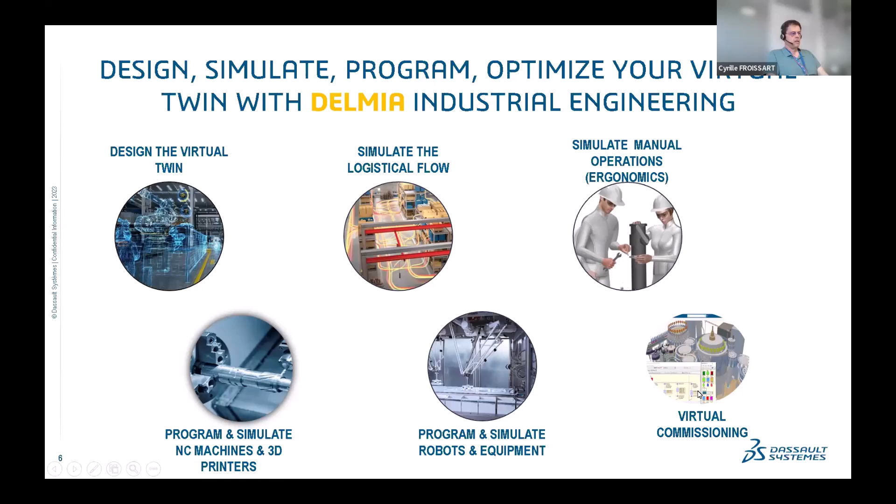So again, the virtual twin: we create the factory in 3D, we simulate the factory in production, we simulate the manual operations, we simulate robotics and equipment, we simulate the NC machines and the 3D printers. And we prepare the programs, and before going into production, we test everything. This is what we call virtual commissioning.

The advantage is that all these solutions are connected because they are all based on the same 3DEXPERIENCE platform. We are using a 3DEXPERIENCE database, and all the applications use the same data set, but for different users. There will be someone in the company with a strong focus and skill on the layout and the building, etc.

Someone will create the factory in 3D, probably using CATIA, SolidWorks or other CAD software. Then someone will take this data and do a simulation in a dedicated DELMIA application. Then another user will probably add the robotic or NC machine simulation and programming.

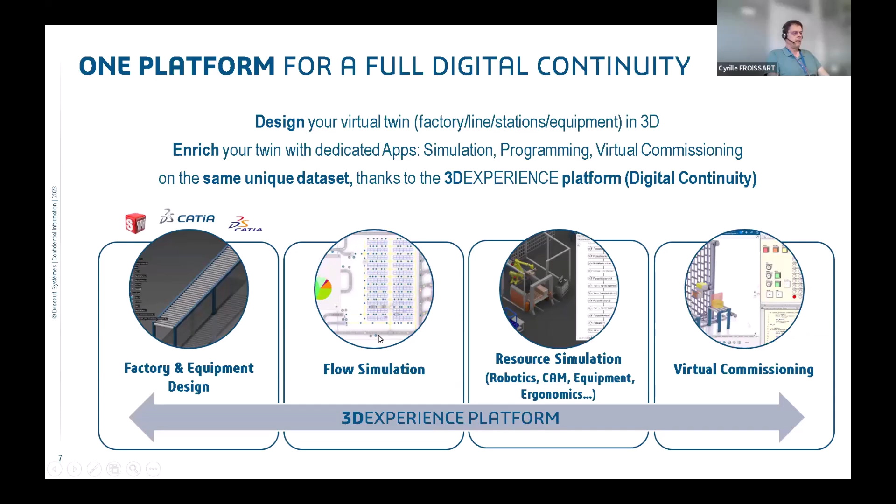And then after, we can do the virtual commissioning before going into production. That's an advantage: it's always using the same data set, the one data set in the database, used by different users just switching between applications, but no more dedicated applications and no more data sets specific to be recreated in each application.

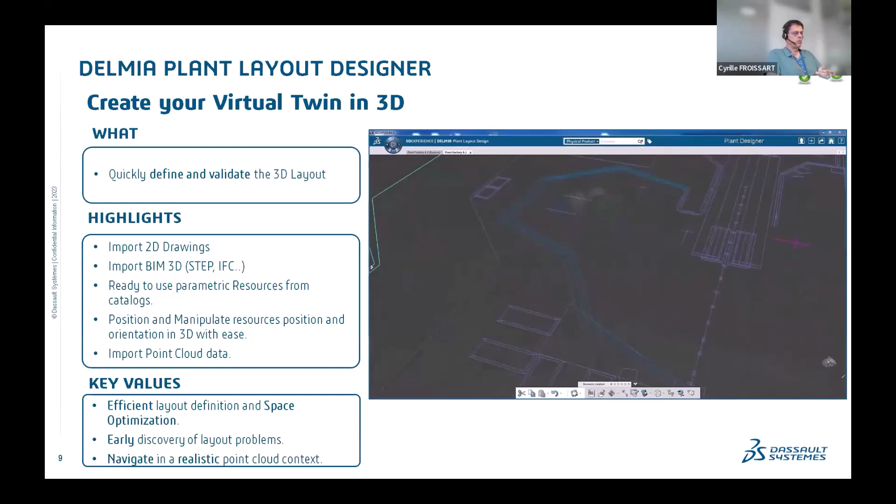So let's focus on the first set of applications, where we actually create the factory in 3D. What we see in the video is that typically we start from a 2D drawing. Here we see the 3DEXPERIENCE platform, and we see the name of the application we use here, Plant Layout Design. So in this application, I start from a 2D drawing that I import, typically from DXF or DWG.

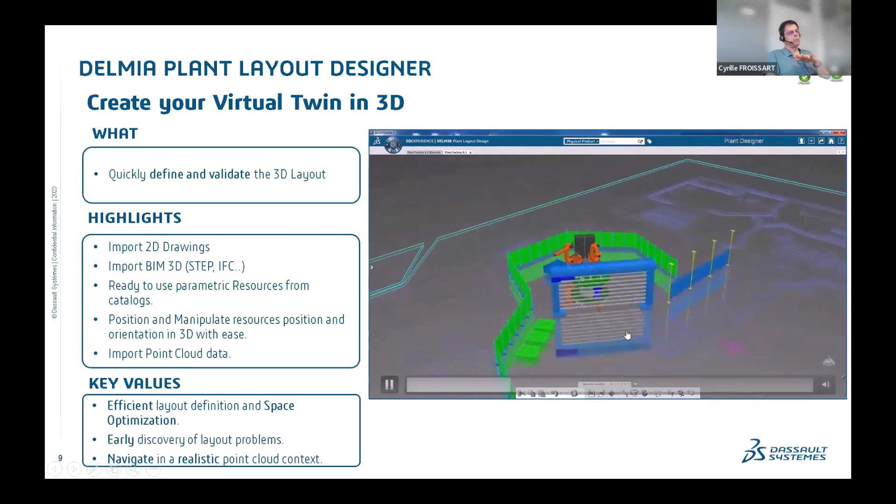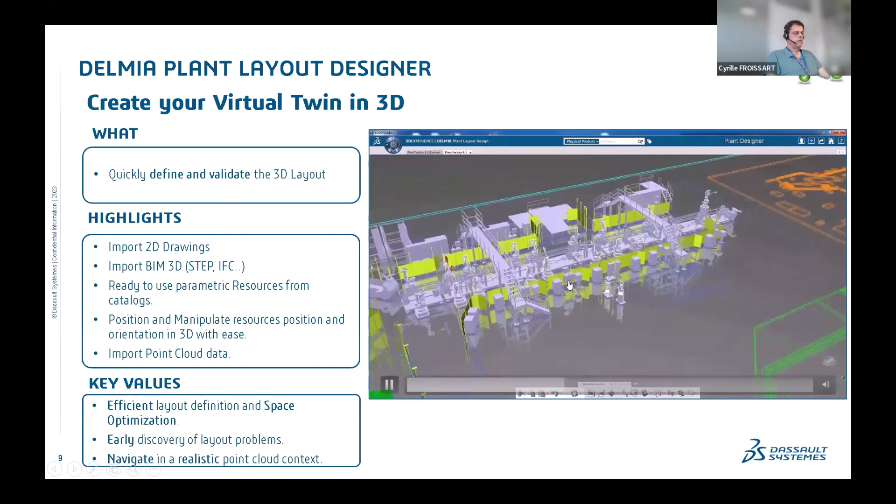And on top of this 2D, I can position my 3D devices coming from my library of robots, for example, but also coming from other CAD sources if I have the 3D model of the equipment. I can also use some specific BIM format like IFC.

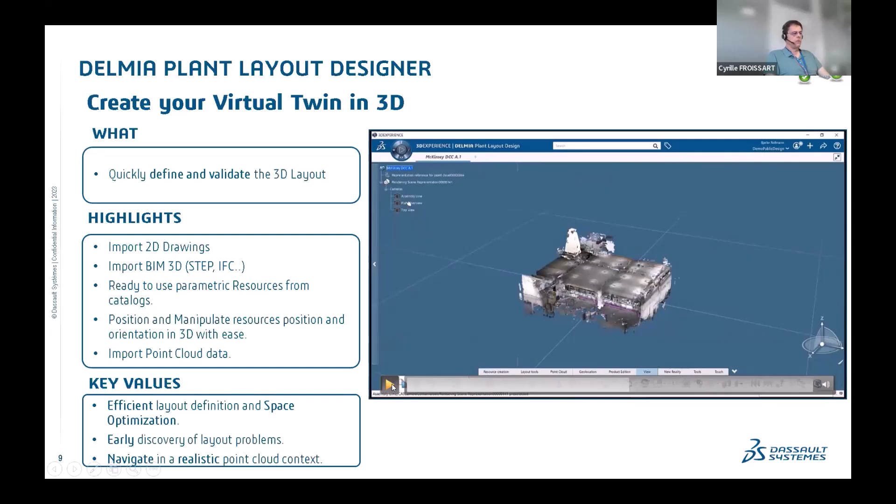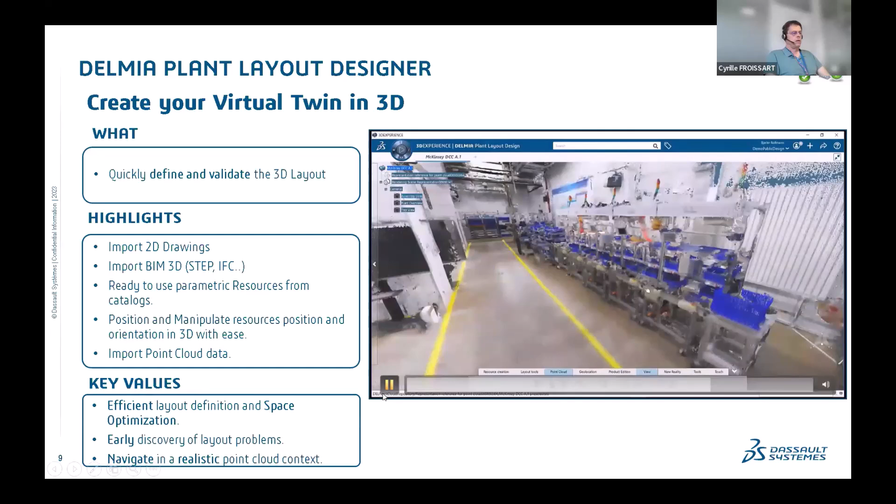And here is also an important capability, because we don't always start from scratch. We also have some existing factories, and now more and more we have point clouds. So we have the capability to import point clouds in any format, like E57. And in this case, we can actually simulate a mix between real 3D and point cloud.

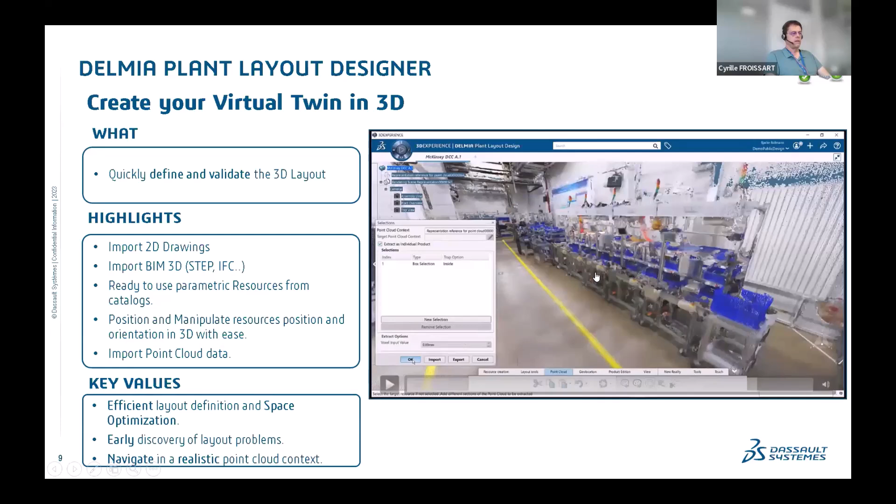For example, what you see on the screen here is that we can remove a part of the point cloud, and I will then check: if I replace this existing machine by a new one where I just have the 3D, I can simulate the new process.

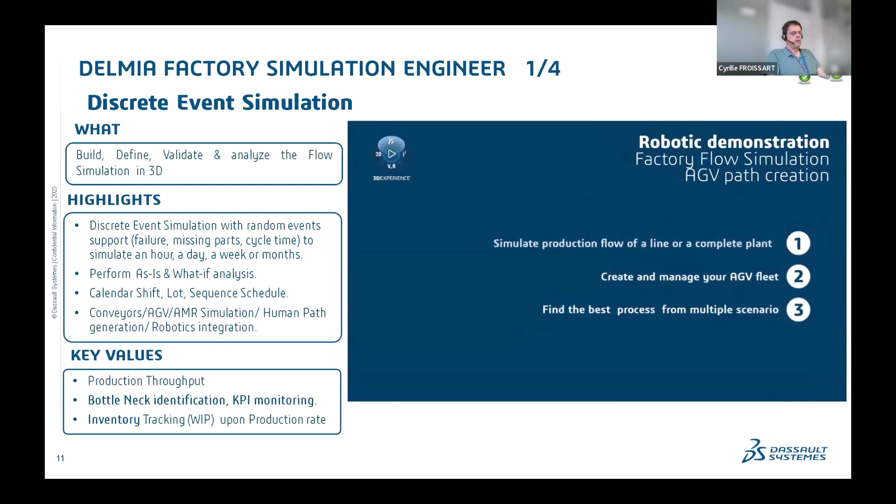Okay, so now my factory is there. The building and the machines are in the correct position. Let's start to do a first simulation. I want to simulate my factory not only statically but actually in production. So now I'm using a new application, factory flow simulation.

But again, the advantage of the platform is I just switch from the plant layout to the factory flow application, but always in the same session. No need to start another software to create a new data set. I'm just reusing the previous data set, but adding some new information, because I am now an expert in flow simulation, and I add the information that I need. For example, the source, the sink, the time, the distribution time, and I can do some analysis with some KPIs.

So when I run my simulation, during the simulation I have some KPIs, such as the time spent on each machine, on the storage, the amount of product in my buffer, etc. The number of parts I can produce, and I want to check if I can reach my production target.

So here, for example, we see that this machine is busy when it's green. When it's blue, it means it's waiting. Here on this robot, I think there was a failure, with the red color. So it's a very nice way to understand where the bottleneck is, where the problem is in my factory.

And with the global view here, I'm not very interested in what's actually happening at each station. I'm more interested in the global view of the factory and understanding if I will be able to produce my product with the performance I want.

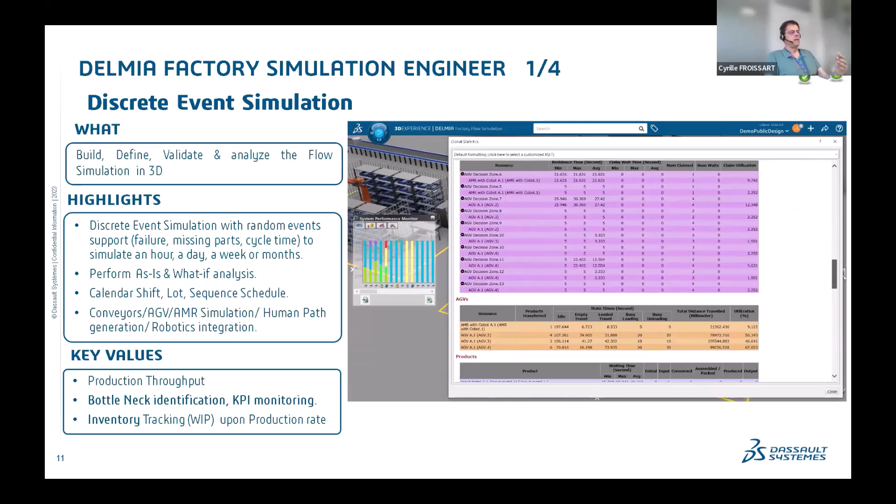Again, green is busy. And at the end of the simulation, what is very important, what is actually the goal of the simulation, is to get this report. Because the simulation in 3D is nice to understand what's happening, but at the end here I have all the numbers, so I can check that I have produced the number of products I want after, let's say, 1 hour, 1 day, 1 week, 1 month. This is the advantage of the simulation: we can simulate 1 month of production in a few minutes.

Okay, so here we see some capability around logistics. We can simulate the assembly lines, but not only that, we can also simulate all the logistics, and we can define the route for the AGV or the AMR.

We also have the capability to define advanced parameters for the AGV. For example, we can define the charging status, and I can anticipate some problem with my AGV, that I need to charge it again, or my AGV or AMR is no longer available. This is because the simulation has to be realistic.

So here it's a way to do my sizing. I want to have 10 AGVs in my factory. Is it enough or not? Do I need more AGVs or more AMRs? How many robots? How many machines? How many workers? I want to prepare everything and check that before going into production.

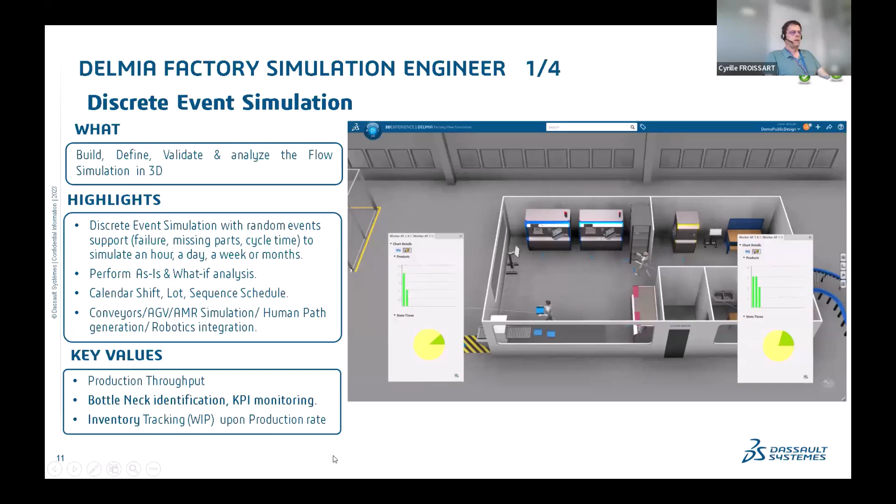I will reach the production I want, taking into account some failure too. I can define some failure with a certain MTBF, and check that even if I have some problem or rework in my line, I will still be able to reach my production target.

So now let's go to the next one.

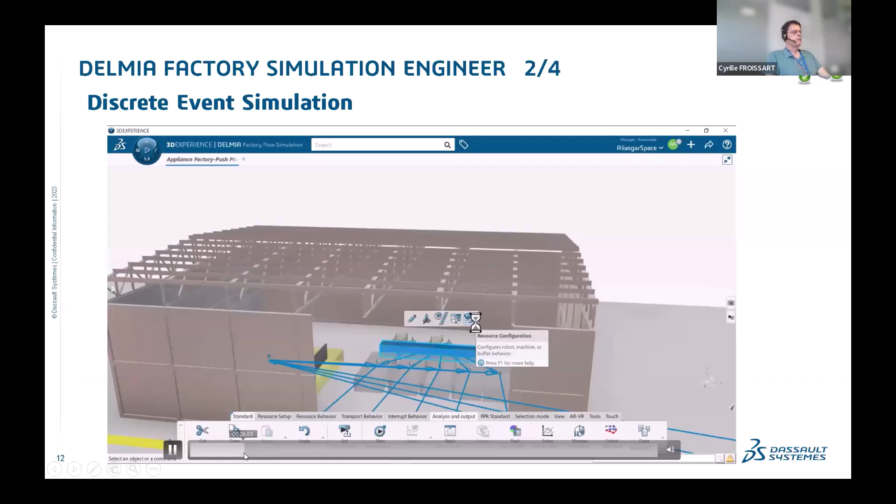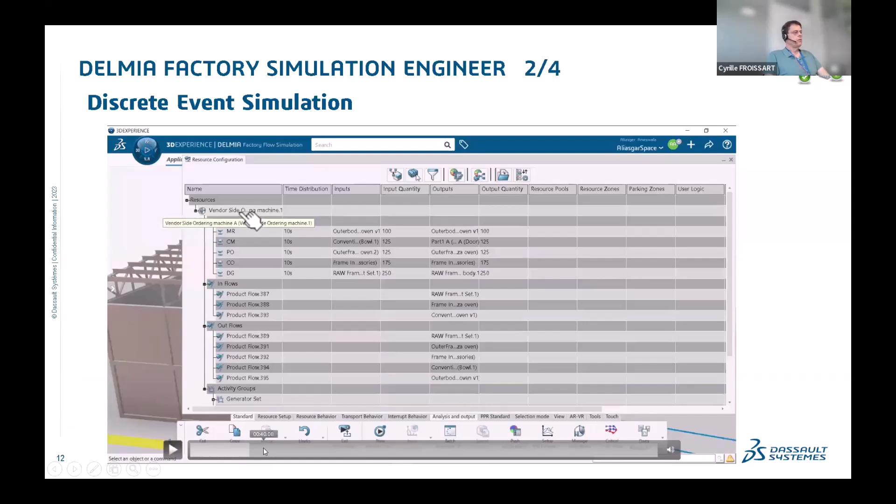Here it's a more complex use case where we typically have an OEM with 3 assembly lines doing assembly of appliances, and here we have a supplier providing some parts. We can define the sequence of operations, the sequence of products to be produced at a specific station. Here I have 5 different products to produce, and I can define the order in which I want to produce them.

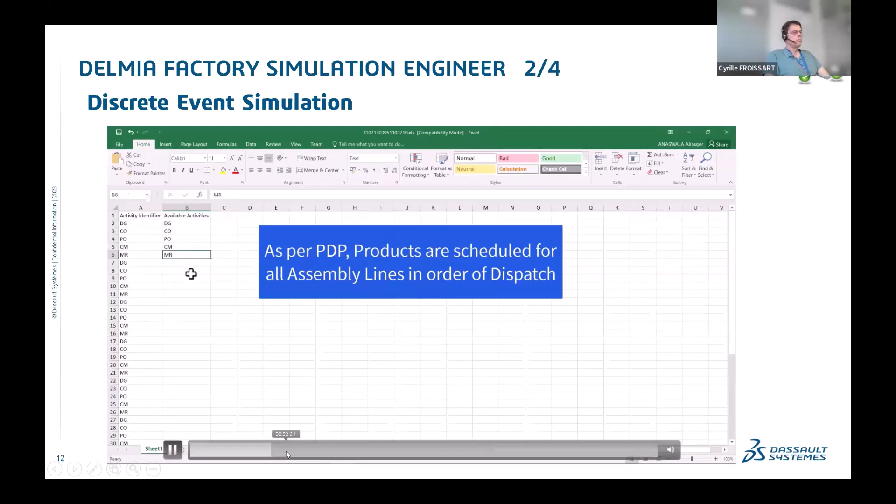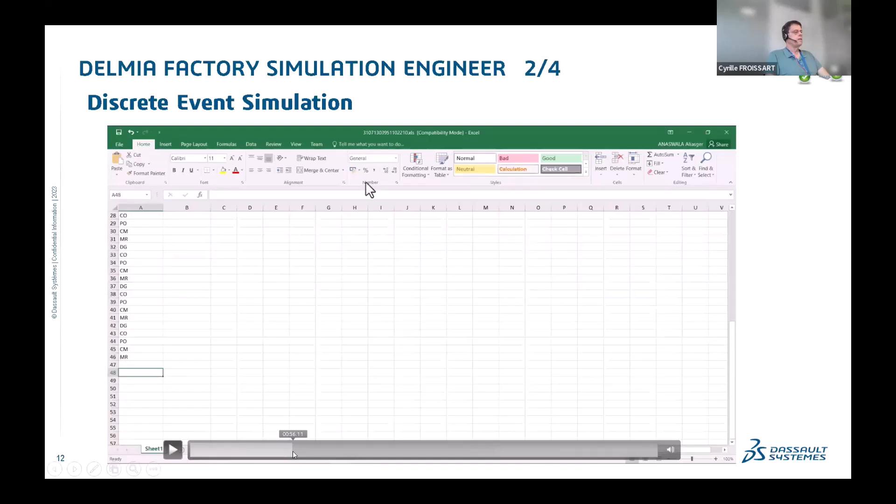Then I apply this plan, the production demand plan, PDP, and I check that I can effectively reach it if I simulate this plan. What happens? Let's start the production. I have defined the production demand plan, and I run my simulation.

Here the supplier will produce some parts that will be delivered to the main factory assembly line at the OEM, and this is a pure push mode production. The supplier will push and produce parts, and these parts will then be used in the final assembly line.

So we also have the capability to simulate the pull mode. We'll see that if we switch from push mode to pull mode, we can still produce the same amount of final product, but with a reduced number of parts in the buffer.

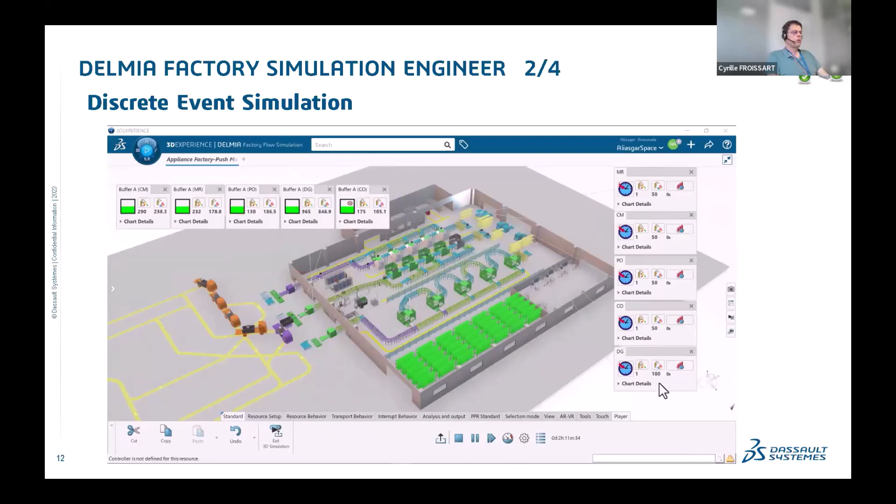Another video where we see this, which is interesting: I create a source, and then I create the flow of the product that will go into my line. On the source, I define which product it is.

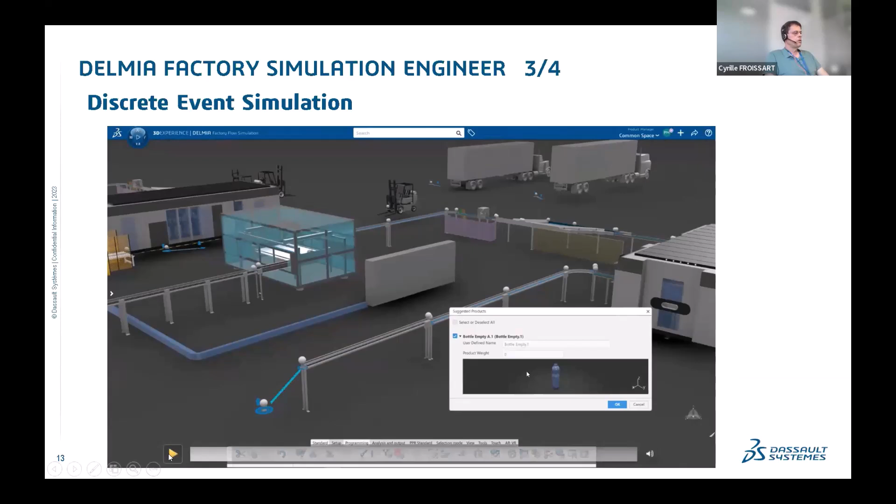So here it's a bottle. I will define that this source will produce a bottle at some interval, for example every 10 seconds, or I can define a time distribution like normal, lognormal, or any distribution time I want.

Now that I have defined the line, I run the simulation. Here we have the play button, which we have everywhere in the 3DEXPERIENCE platform. At the station, the source produces the part, then we have the station.

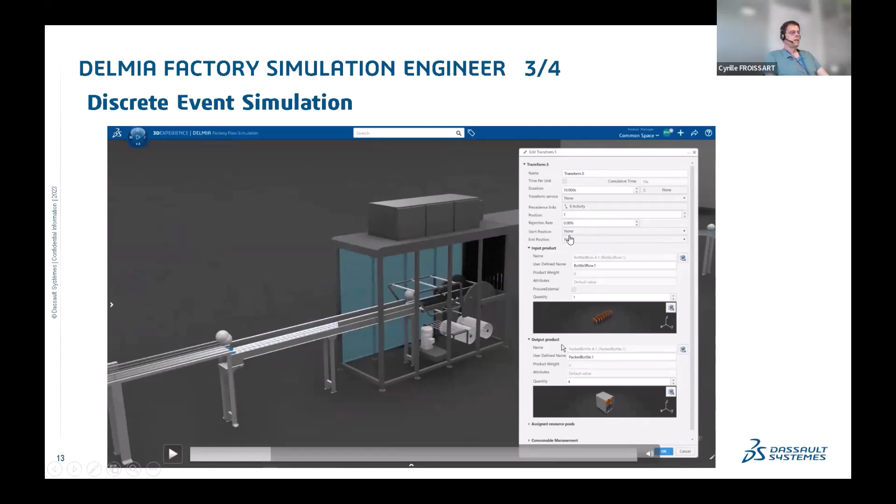So at the station, we say, okay, we have a transform activity. At this station, I will take a certain number of bottles, and the output will be the bottle plus packaging. So this is a packaging machine, and this activity will take some time. By default, 10 seconds, but I can change the distribution time if I want. So I do that on all the stations.

And then I can run my simulation and check what's happening, taking into account this distribution time and all the equipment I have in my station, in my factory, including the forklifts, the AMR, the conveyor, etc.

And here, what's happening here? We define some failure, because it happens in reality. So here, really, the simulation, we want to have a realistic simulation because we can also simulate some issues, like missing part, failure, etc.

So I can define it with my distribution time. I can define the time between failure and also the time that I will need to repair the failure. And here I can define that for this failure I will have a team of workers, a maintenance team in charge of repairing the failure. But maybe the worker will not be available, so the failure will stay for some time. This is something I want to simulate as well.

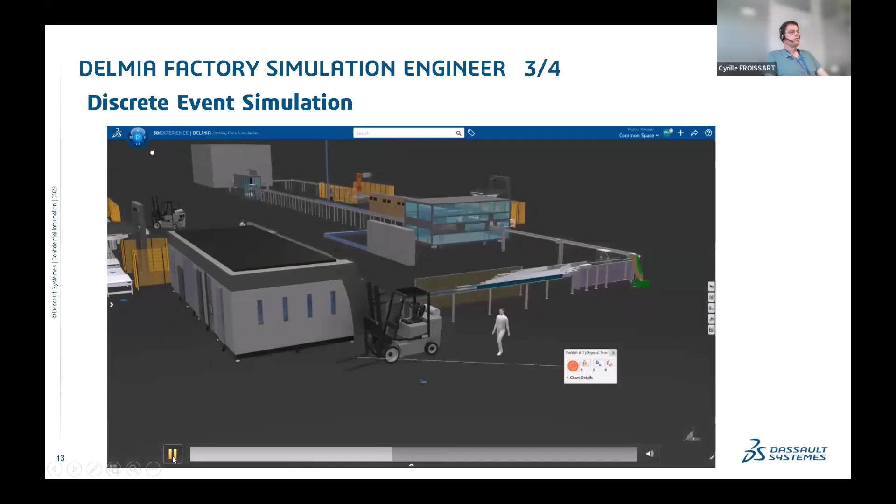So now I have defined the failure, I can run my simulation again and do some what-if analysis. I can maybe increase the number of workers, etc.

Last video on this topic.

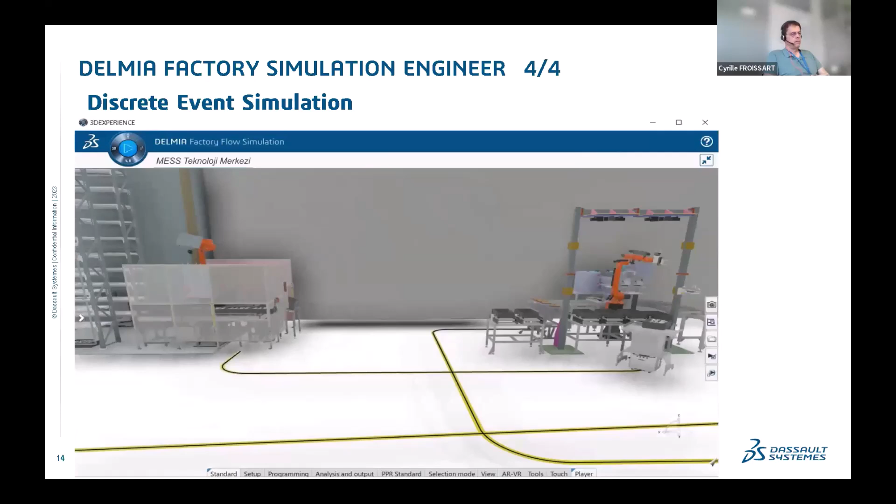So the first goal of the flow simulation is to understand if I can reach my production, how many workers I need, machines, etc. But one of the goals is also to communicate. I have my project for my new factory. I want to explain it to my customer, to my partner, or to my management. I want to explain what I want to do.

And 3D is a great tool to communicate, especially using the 3D Experience platform where we can collaborate with many people. All the people are connected to the same database and can have access to the same amount of information, no need to share files. So it's also a way to explain the project you have for a new line in your factory.

I think I finished on the virtual factory and especially the discrete event simulation solution.

So now, Julien, maybe you want to explain what is the DELMIA solution? Thank you, Cyrille. So at Dassault Systèmes, we are building on more than 30 years of experience in the field of robotics. And with the 3D Experience, we now have the most advanced robotics solution ever to simulate and program robots, as well as doing virtual commissioning.

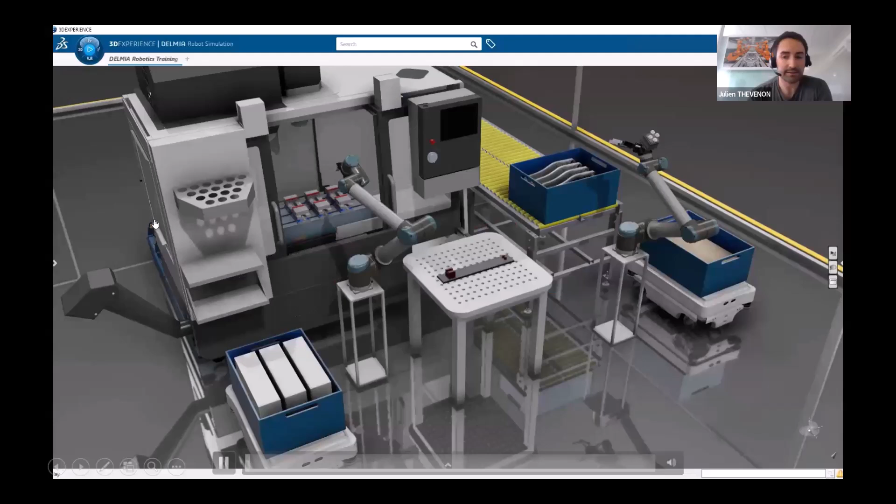So we offer a solution that covers most processes. It starts with material handling, or also known as pick and place. A good example is machine tending. So here we're seeing some UR cobots loading and unloading raw material and parts from an NC machine. It could also be a press line simulation, for example.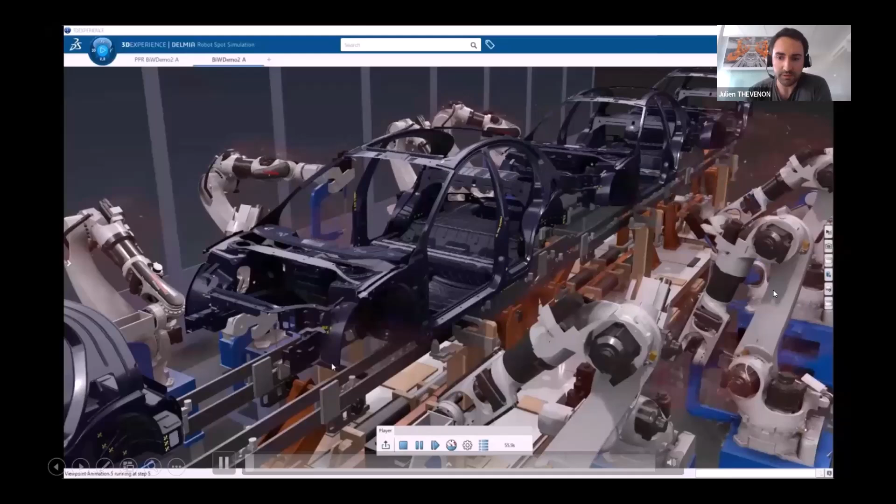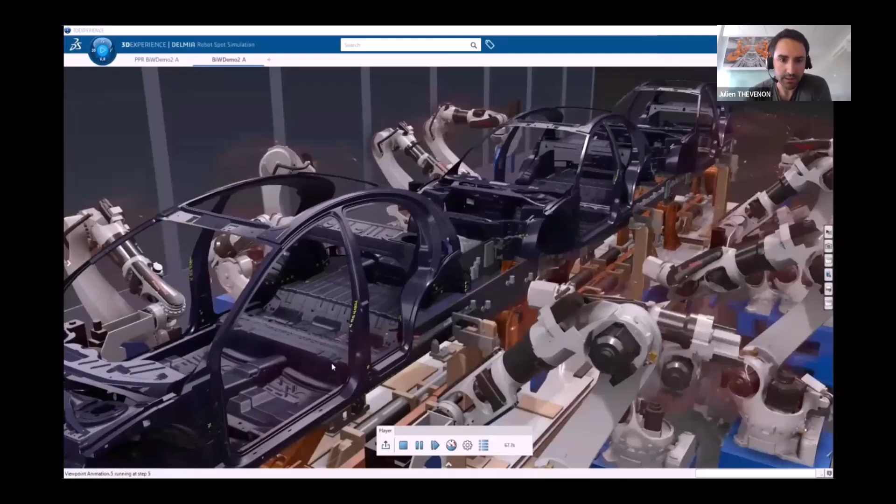Another category which is very important is point-to-point processes, like body-in-white, which is spot welding for car bodies. So here we are seeing a typical line composed of many Kawasaki robots. And here the challenge is to ensure that there is no collision between the robot and its weld gun with the product, but also with the tooling and between the robots together.

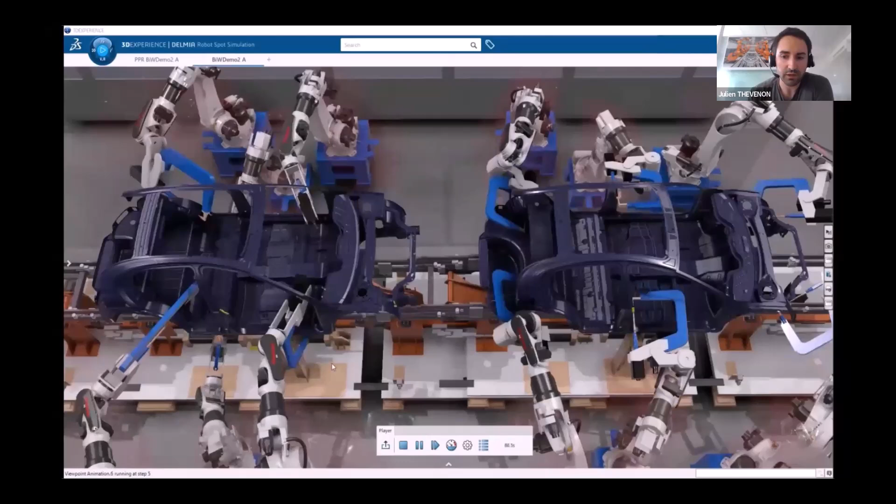In the same category of application, we also cover point-to-point processes like drilling and riveting, for example, which is very much used in the aerospace industry. And here we have a dedicated tool, a dedicated interface for this kind of industry-specific requirements.

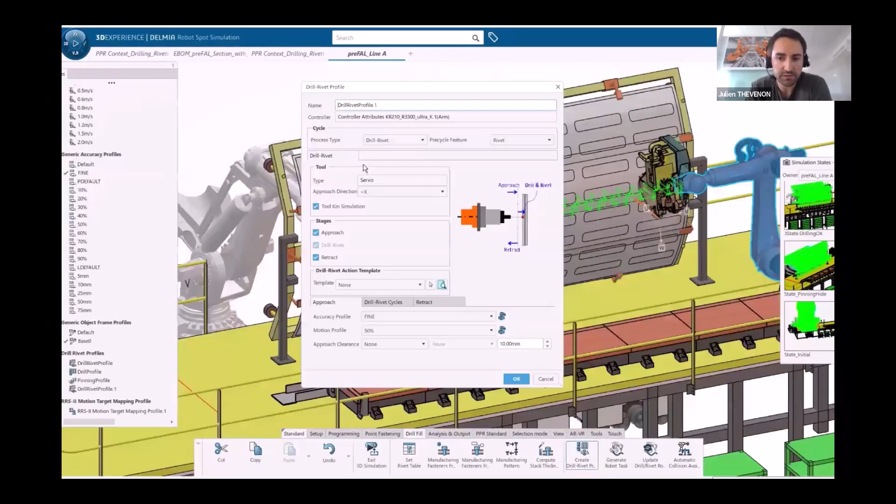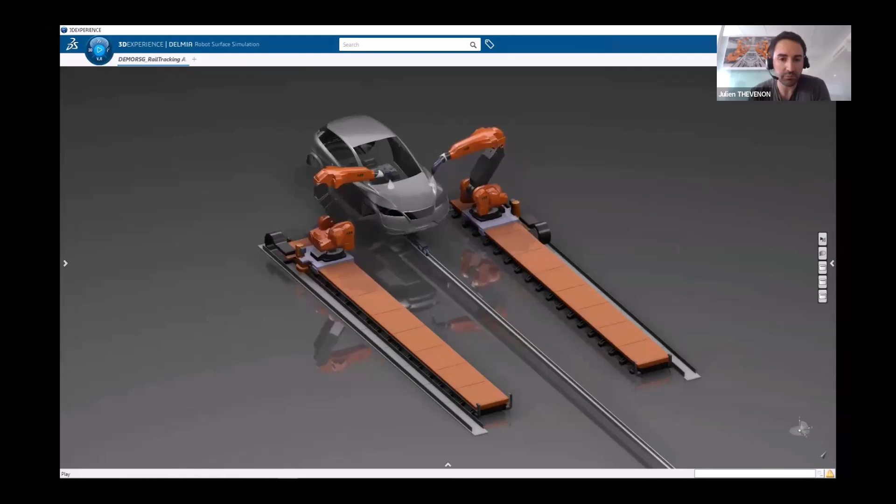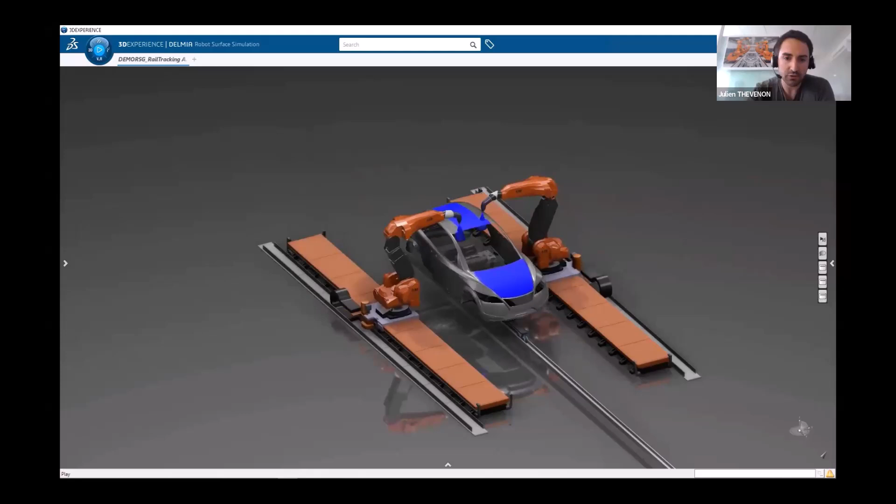We also cover surface processes like painting, shot peening, and polishing. Here we are seeing a painting process of a car. It's a very interesting use case because we are using what we call line tracking and rail tracking. So the robot defines its trajectory based on the geometry of the product and also the movement of the product. Everything is computed in real time. And we can go as far as simulating the painting thickness on each area of the car to make sure it's meeting the product requirements.

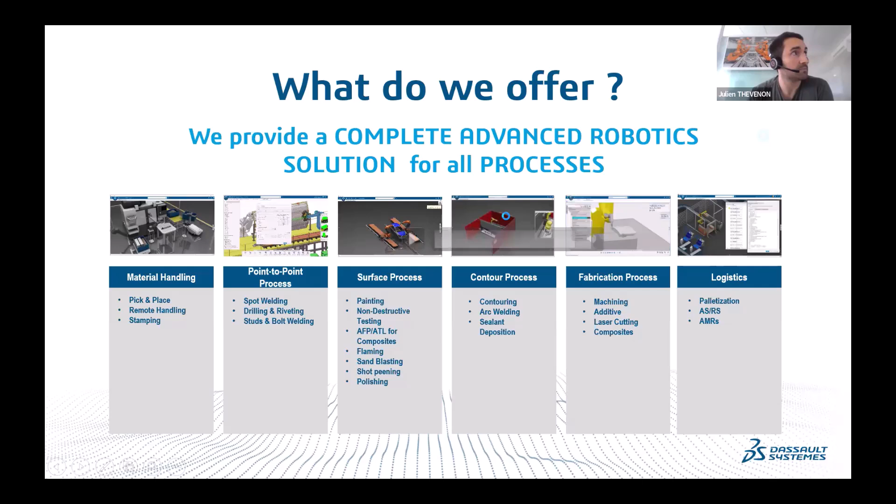Next is contour processes, like arc welding, sealant deposition, or roller hemming. Here we are seeing a typical arc welding cell where we program the robot synchronized with the positioner.

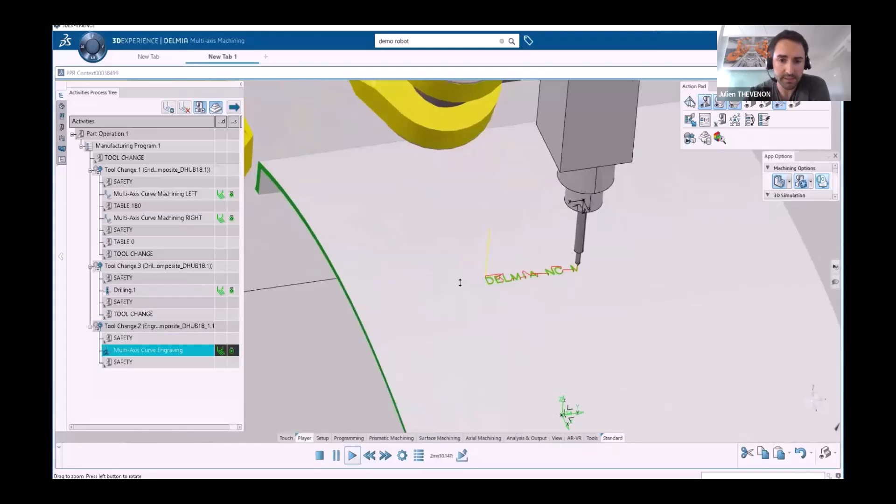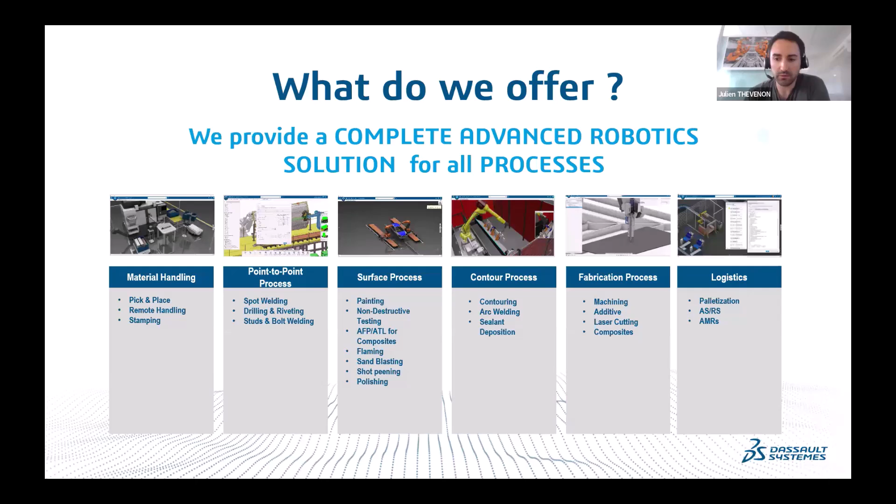We can also combine our DELMIA machining solution and our DELMIA robotics application because we are on the same platform to do milling operations using a robot. We can also do other types of processes like engraving, drilling, and additive processes with the robot. Here we're seeing a very simple case of additive process, material deposition with a robot. And one of the last additions is logistics processes, so processes like palletization, and we can also manage ASRS systems and AMRs.

In robotics, you will get to work with many different robot brands like Fanuc, ABB, and KUKA, but also with some emerging players, mainly from China, such as Siasun, Aubo, Effort, or Inovance. This diversity is a challenge because each brand uses its own unique programming language. That's why we developed a robotic solution which can simulate robots for many brands.

In the same environment, you can simulate and program dozens of robots from multiple brands. We provide quite an extensive library of more than 2,000 robots that we regularly update to make sure it includes the latest models. We also provide OLP translator at no extra cost as part of the solution out of the box for the main robot brands.

So our customers can design their product in CATIA or SolidWorks, CATIA V5 or CATIA 3D Experience, and then define their process and do their fastener planning in DELMIA Process Engineering before running their robotic simulation and doing offline programming in DELMIA Robotics.

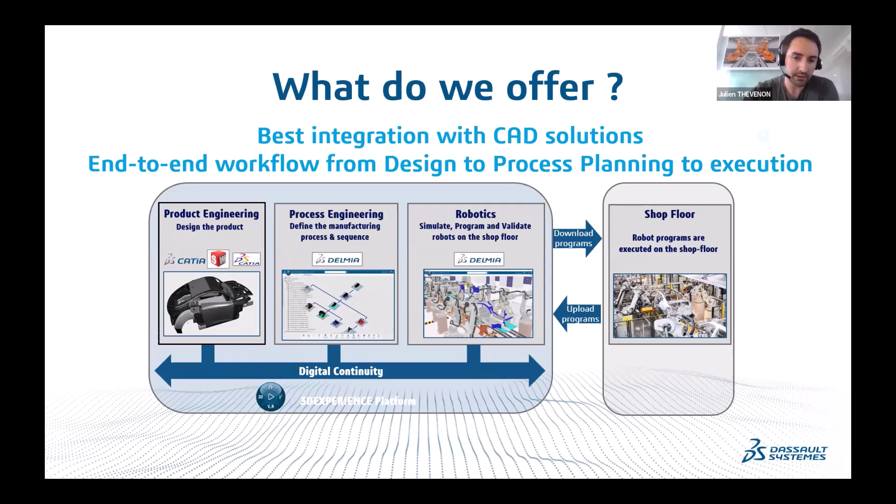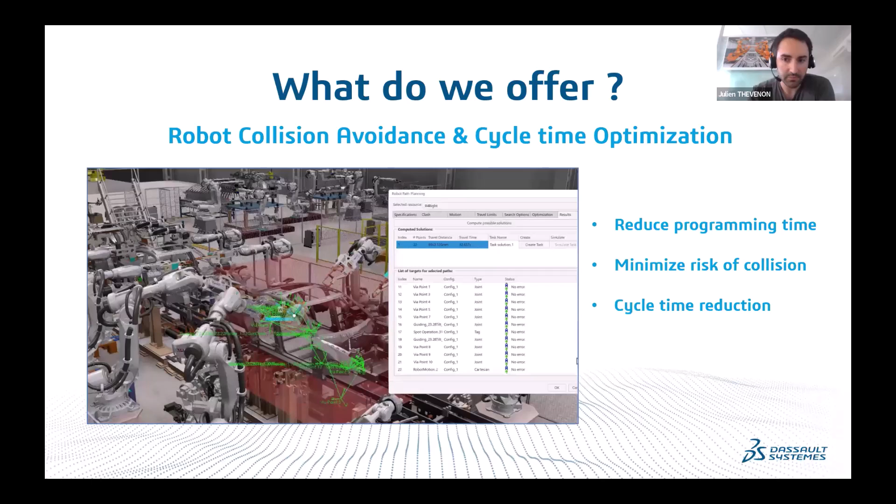Our solution includes some very powerful features, such as this one: robot collision avoidance. Here we are in our spot application I was mentioning a minute ago, and our solution can automatically calculate the fastest trajectory between very complex points to ensure there is no collision and that we achieve the smallest, most optimized cycle time.

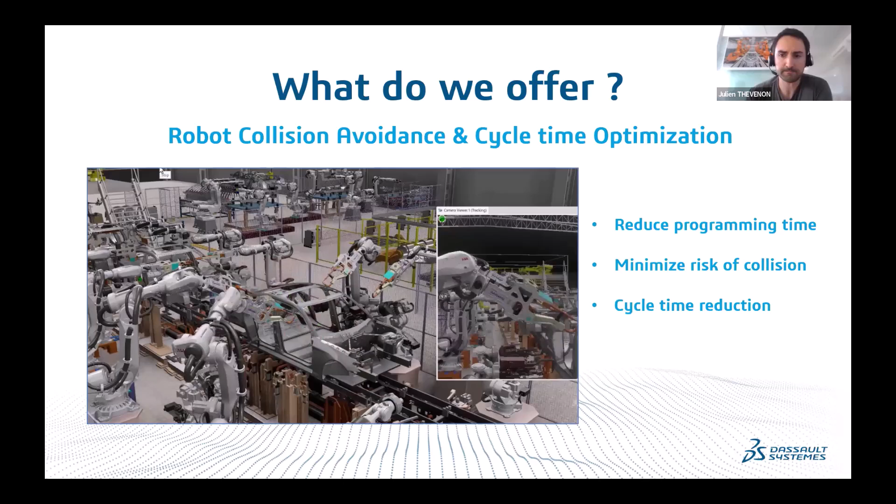Another key aspect is that we can easily connect to the physical world. For example, we can connect with the virtual robot controllers. Here in this video, we're showing how we connect DELMIA Robotics to FANUC RoboGuide. We are actually replaying a FANUC simulated program on the VRC of FANUC and replaying it back in DELMIA Robotics to ensure it's correct. By doing this, we can get the exact cycle time and trajectory of the robots, and also it makes sure that we save a lot of time when it's time to do the final FANUC TP programming.

And of course, we can also connect to most robot brands. This type of VRC can manage KUKA or ABB, for example. And we can also connect to most robot brands using RCS through the RRS standard.

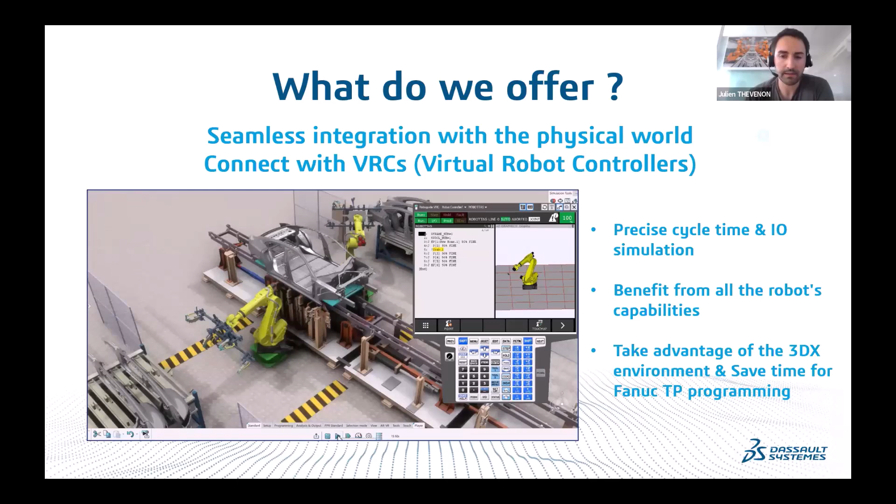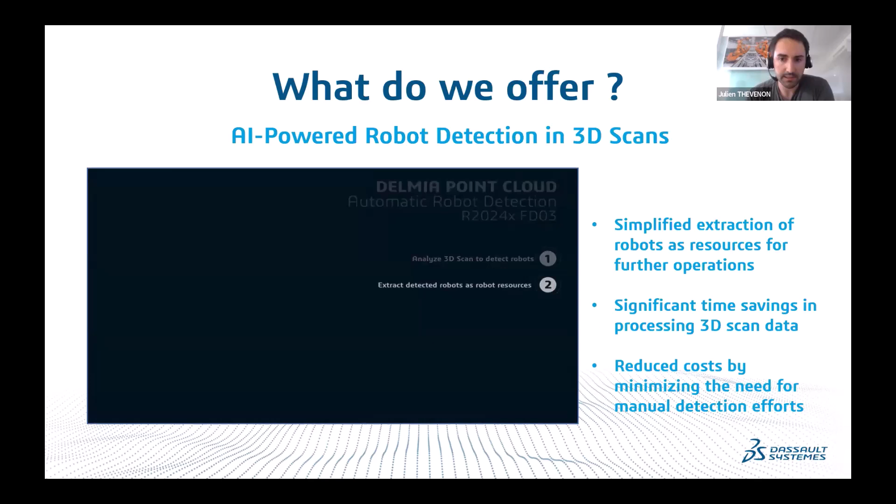More and more, we are integrating AI technology in our solution. In this example, we have a point cloud of a factory that we are opening, and our solution can automatically detect the different geometries in the factory, detect that it is a robot, and facilitate the user experience so we can replace it more easily with an exact robot from our library.

And I think back to you, Cyrille, on machining. Okay, so thank you, Julien, for this update on DELMIA for robotics. So now DELMIA for machining.

Again, we have mentioned that already, but the most important value of the DELMIA solution is what we call digital continuity. What does it mean practically speaking? It means that, for example, in machining, if I have my product here in my CAD, in CATIA, I can do my design at the engineering department. I save my product in the database in my 3D Experience server, and then my manufacturing engineer colleagues can define the process plan, the sequence of operations to be performed to produce this part. And maybe one of the operations will be to do some machining.

So then the programmer will be able, starting from the process plan, to open the context at this operation, get the part to be programmed, and starting from the raw material, you will be able to do the NC program and to simulate this program.

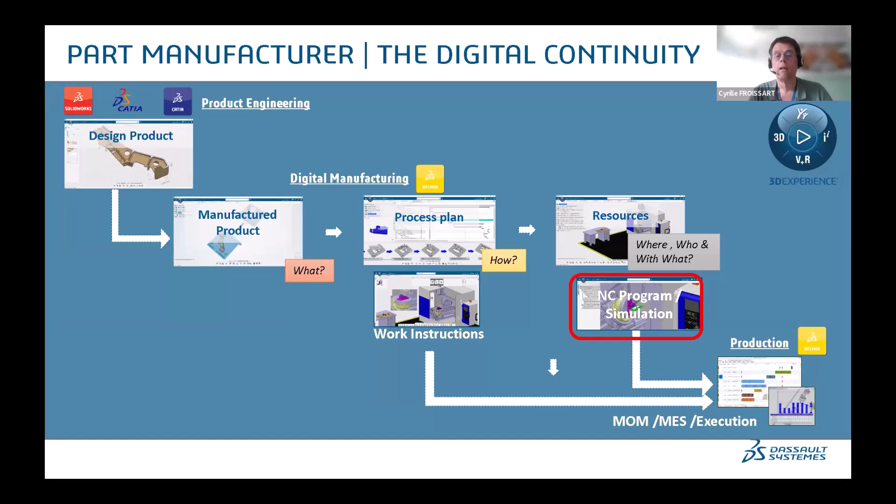And then later, because digital continuity is not just between design and manufacturing engineering, it's also with the shop floor, so we can then later push the program created here to the shop floor to be used by the Apriso MES and to be distributed to the NC machine. So this is what we call the digital continuity, and here it's a very simple example.

I have my toolpath created in DELMIA machining on the pocket, designed in CAD. Here I do a change in CATIA, I do a change of my pocket, and in one click I can update my trajectory. So my toolpath is always completely based on the 3D. So any change on the 3D can be replicated very easily on the DELMIA side.

And it actually works in the two directions, because I can also have a problem on my machine at the shop floor. I want to change my machine. It's also something very easy here in DELMIA machining. In one click, I can replace my machine by a new machine and recreate the program.

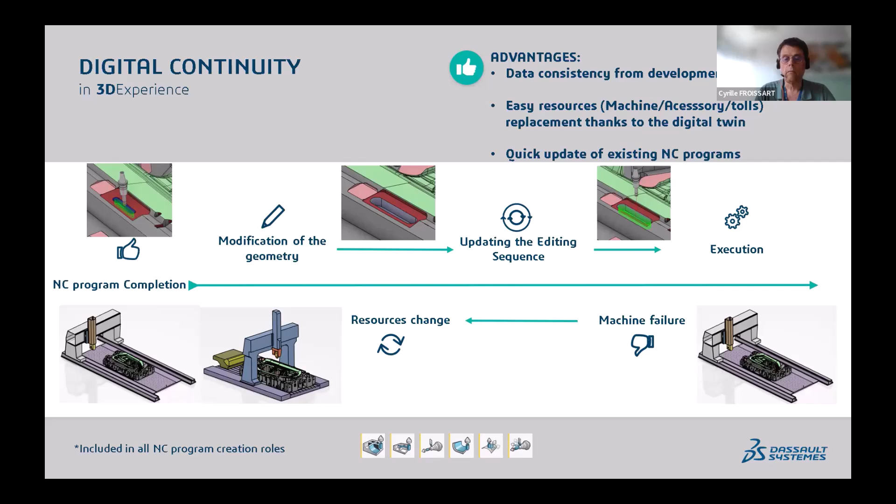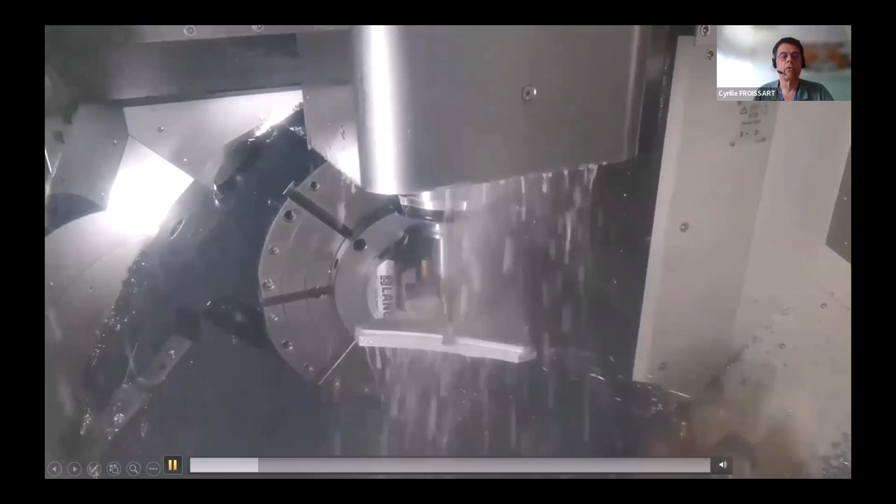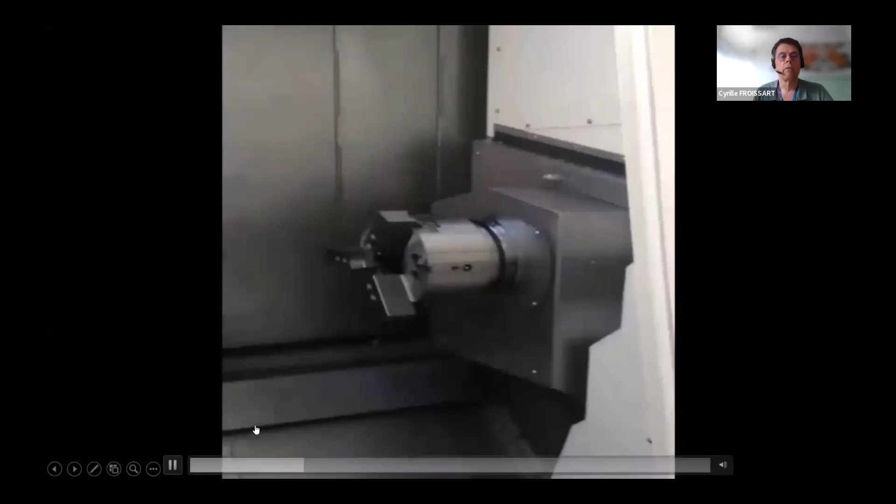So here what we have is the solution for the milling. So here actually it's something that was already available in CATIA V5 machining, but we have also now some new technology where we can also simulate and program mill-turn machines, turning actually and mill-turn machines. So here we have the real machine, and now we can do the simulation and define, sorry, let me go back here.

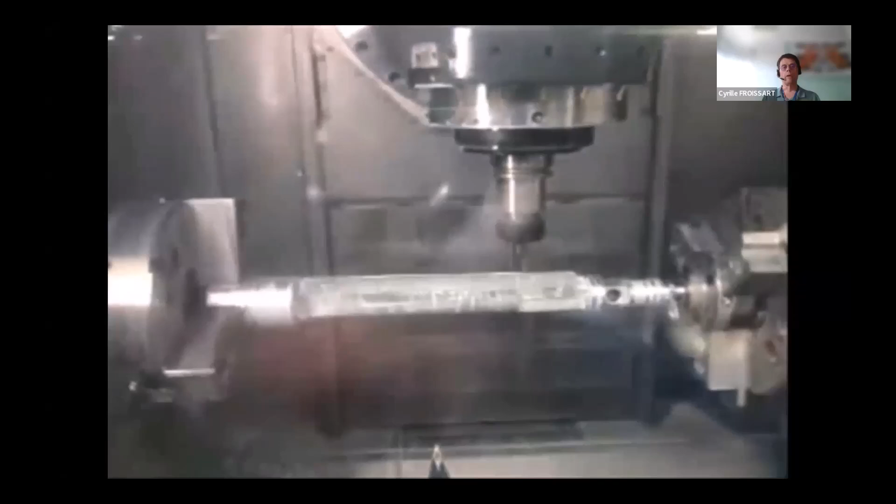We see here the part operation and the machining program with the different operations to be performed. We can detect the collision. We can check if the machining is correct or not. And so here we have the comparison between the simulation and the real machine.

Something that we mentioned already, we can also do machining with robots. And here's something interesting for mold and die, specifically the concentric milling. So we have this capacity to compute the tool path in a way that we avoid the excessive heat on the tool, and we want to save the life of the cutting tool.

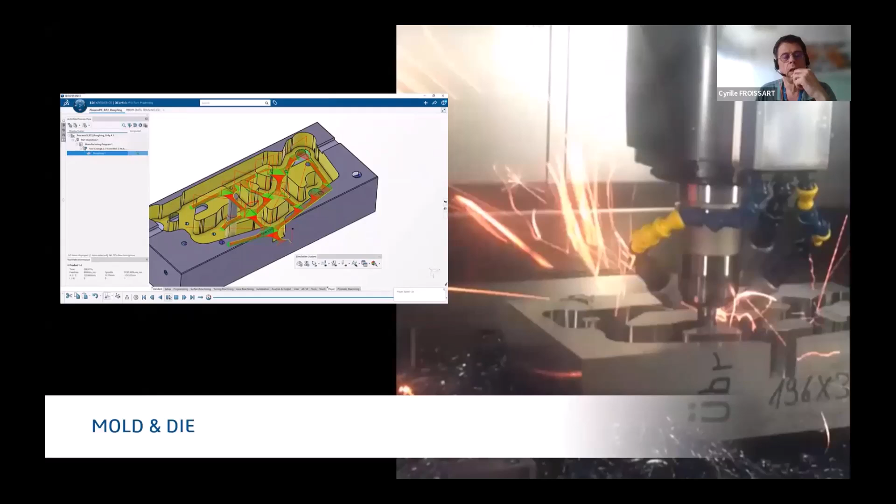So we can avoid this by the concentric milling approach, where we compute the tool path in a way that we ensure that we always remove the correct quantity of material, avoiding excessive wear of the tool. Sorry. So let's continue here the video.

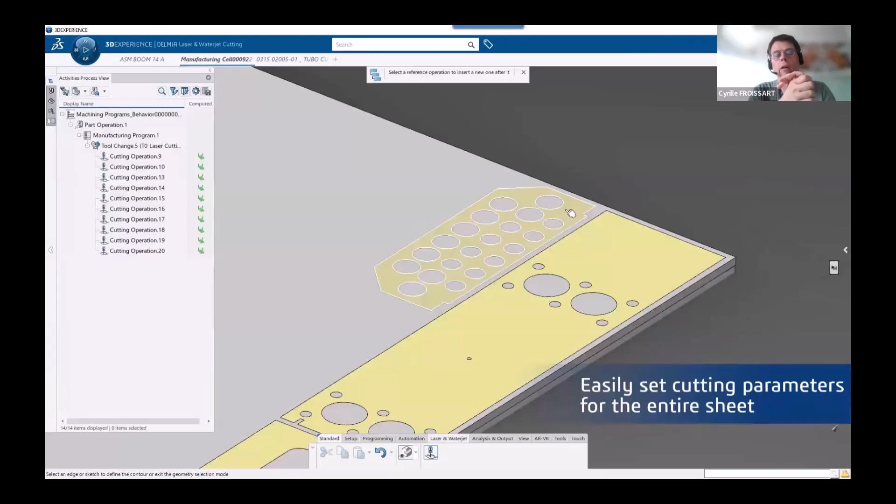After the machining, we also have additive, of course. So we can also simulate and program 3D printers. And something we introduced recently is a new application for laser and water jet cutting, where we can also do nesting. And also important, in all the machining roles we have in DELMIA, we also have now the wire EDM capability to simulate and program this kind of machine.

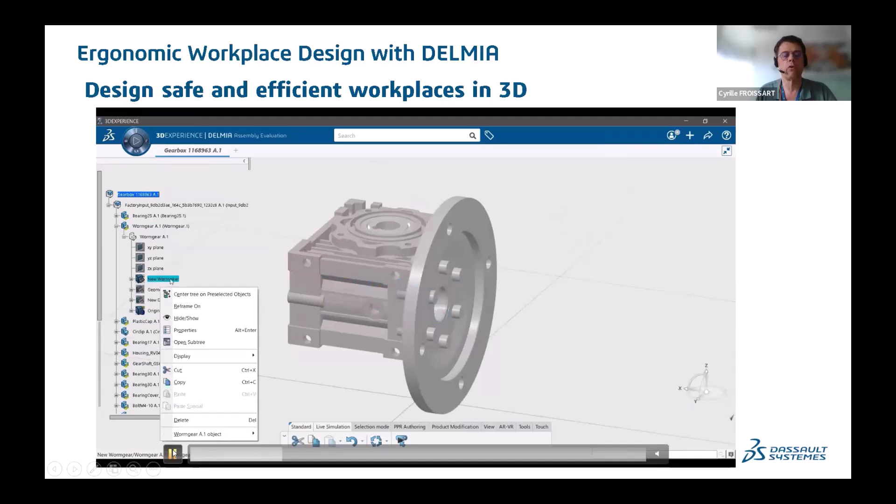Okay, so the last topic will be ergonomics. So here, of course, we want to be sure that the workstation is designed correctly, and that the worker will have a good posture. So we want to check, using some ergonomics rules, if the posture is correct. So I start. It's actually interesting.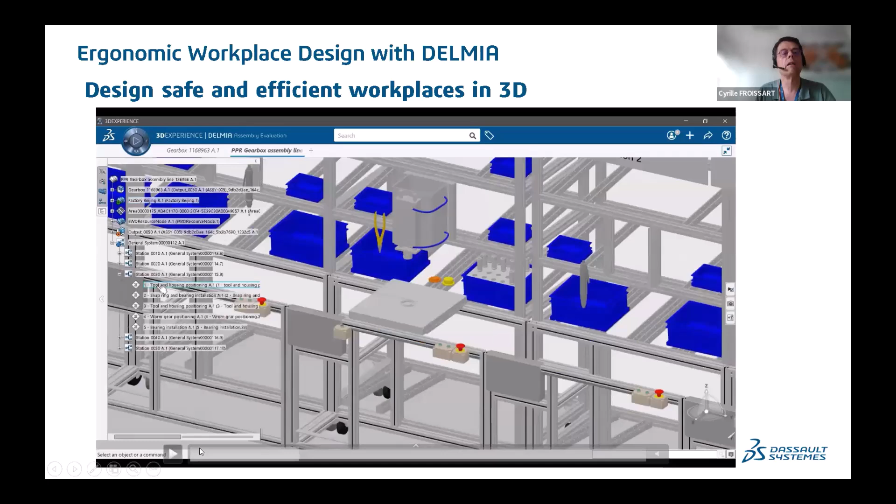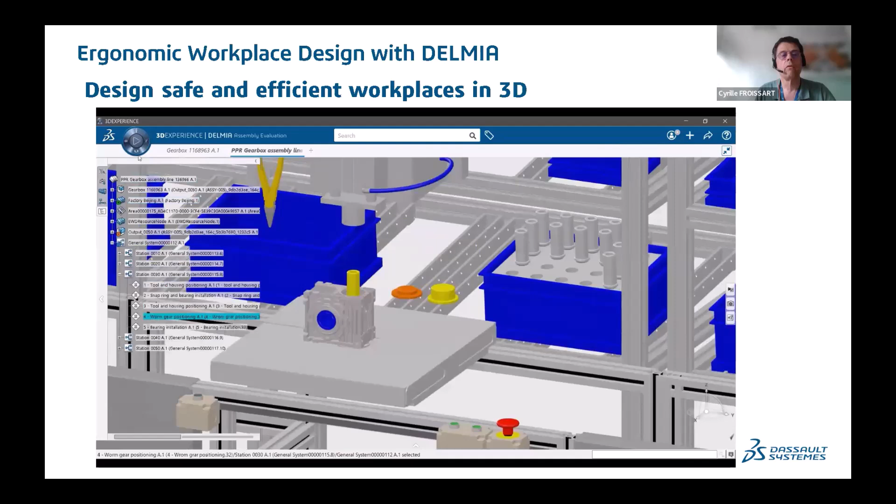We are always in the 3DEXPERIENCE platform. So we start by a search. We open the data set that the other colleagues have created with all the applications that we have seen before. And here now I am on the assembly evaluation application. So actually I will now be able to launch my study. And I want to check if the position of this product is correct.

So I go in the ergonomics application. It's always through the compass. On the top left, there is this compass, and we select the application. So here I have to define the ergonomics task. So I have like a natural way to do that.

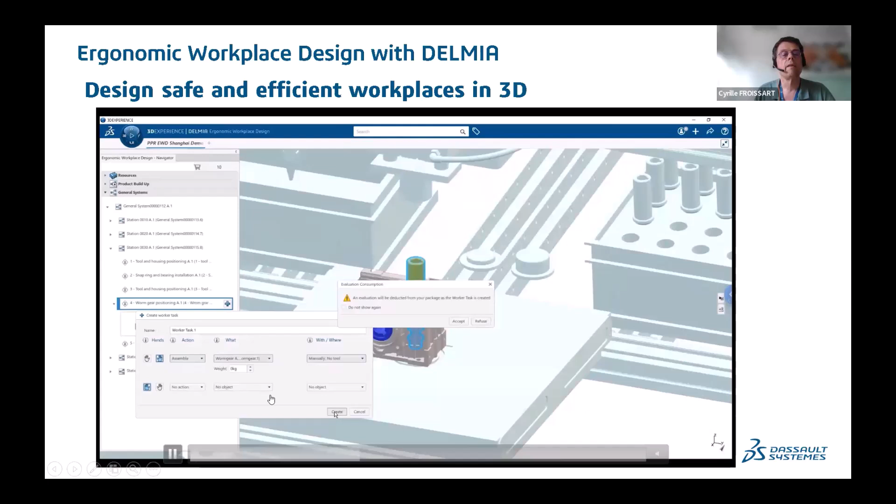I will say that I want to do an assembly operation with a tool or no tool. Here I have no tool. I press the button, and then the computation is in progress. And after a few seconds, I will have an automatic computation of the posture for the mannequin.

And this is quite important, because in the past we already had an ergonomic solution in DELMIA V5, but the user was in charge of creating the posture. Here the posture will be computed automatically, and what we also see is that the posture is computed for 4 different populations, 4 different mannequins: a medium male with percentile 50, a tall one with percentile 95, and also a medium lady and a small lady, percentile 5.

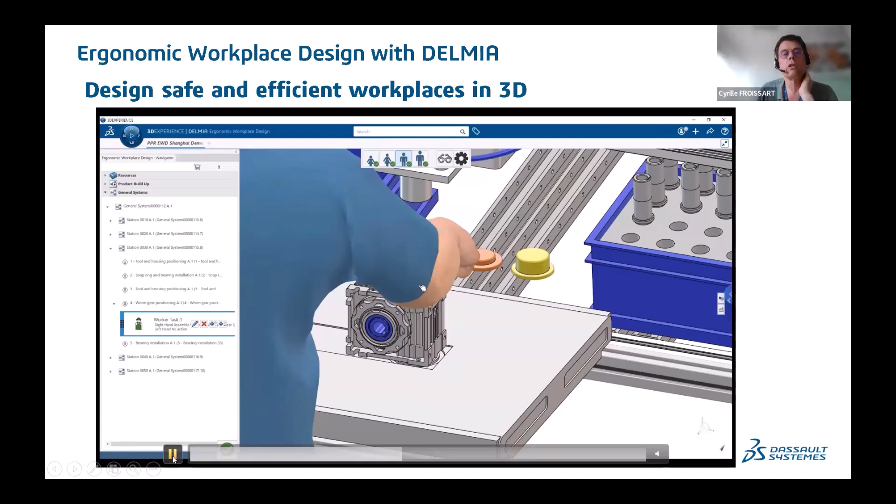So with these 4 mannequins, I'm sure that I will be able to manage 95% of the population. Here I can check that it's okay, and just by pressing this icon, I can check if the percentile can do the job. Oh, here I see that my lady, which is quite small, can do the job.

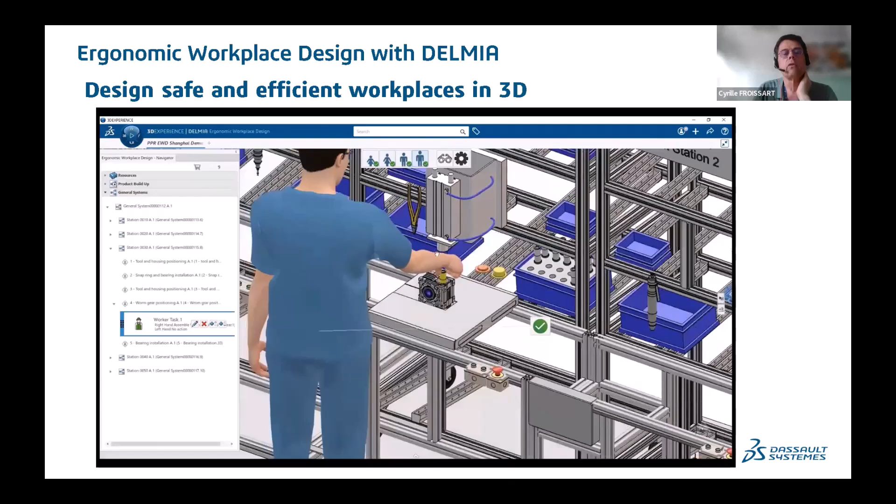Okay, so let's continue now. I have prepared everything. My layout is completed. My robot and NC programs are created. My workstation has a good posture for the worker. But now I want to really go into production, and I want to check not only the robot program and the NC machine program, but also the PLC program.

PLC is important in manufacturing. Normally, we always have a PLC to manage all the devices in my work cell. So I want to connect the PLC to my digital twin, to my virtual twin in DELMIA. So the PLC program will run either on the virtual PLC or on the physical PLC, and will move not the real devices in the real factory, but the virtual devices, robots, etc., in my virtual twin. So this is the concept of virtual commissioning.

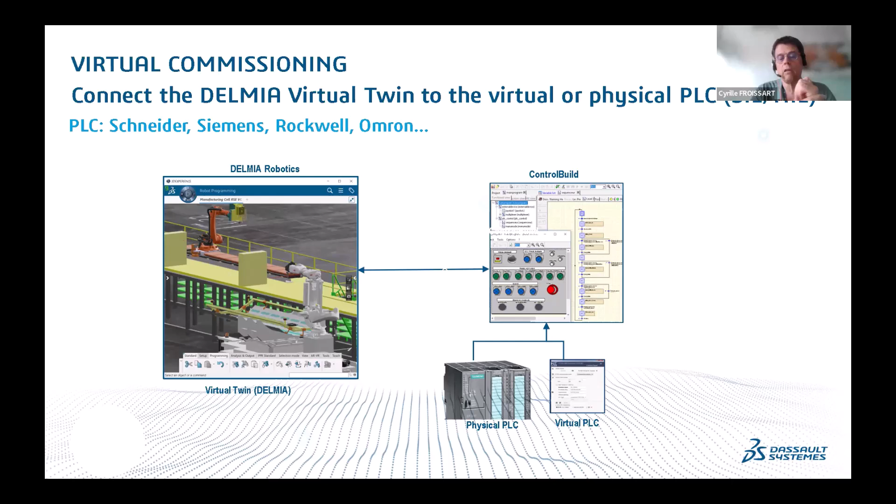The idea is really to save time when you install your line, your station at the shop floor. You are just about to go into production, so you would like to save as much of this time as possible. And you can also check some complex situations, for example in terms of safety, so it's better to test these special conditions virtually and not in the real work cell.

So here we can do what we call SIL, software in the loop, or hardware in the loop. Software in the loop with the virtual PLC, or hardware in the loop with the real PLC. The PLC code is executing on the right, and we see on the left the behavior of the work cell. So here we can do it also with the real PLC. This is what we call hardware in the loop.

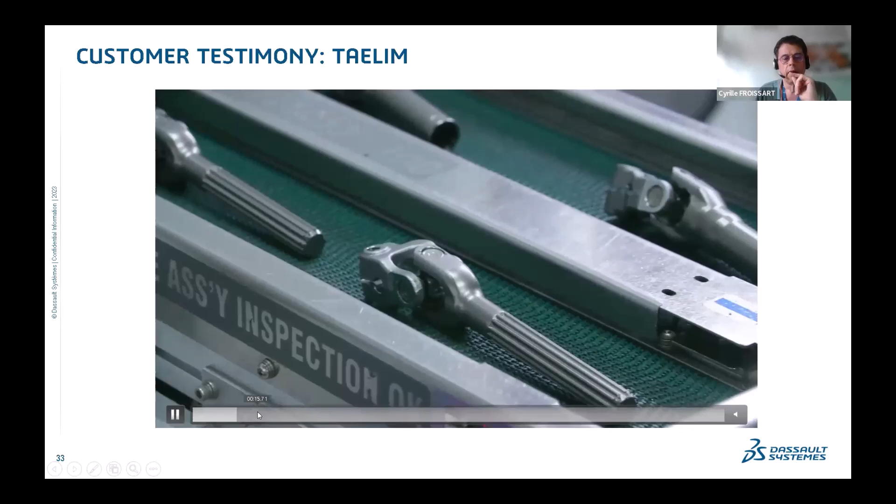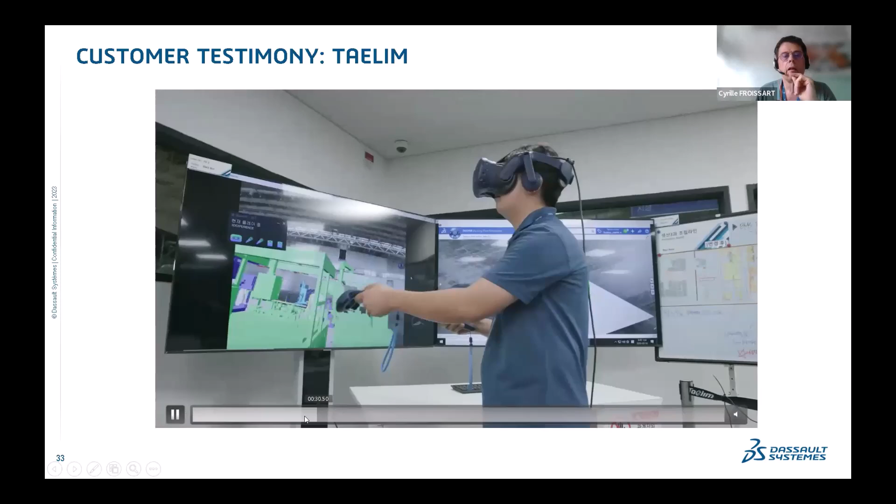Now, quickly, a customer testimony from a customer in Korea. They produce this part, and they use our complete virtual factory solution. So let's go here. This is the virtual factory, and this is the real factory. It's actually very, very similar. Here, this is the virtual, and we can check with this cobot that the cobot can do the job.

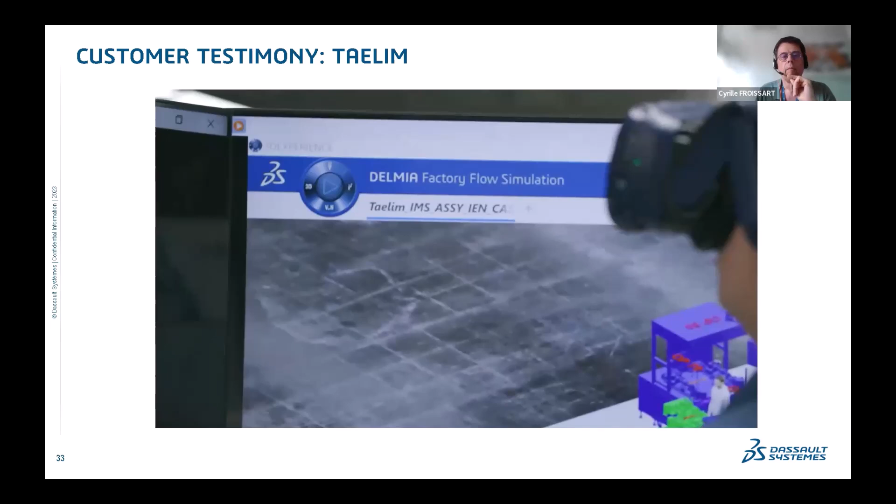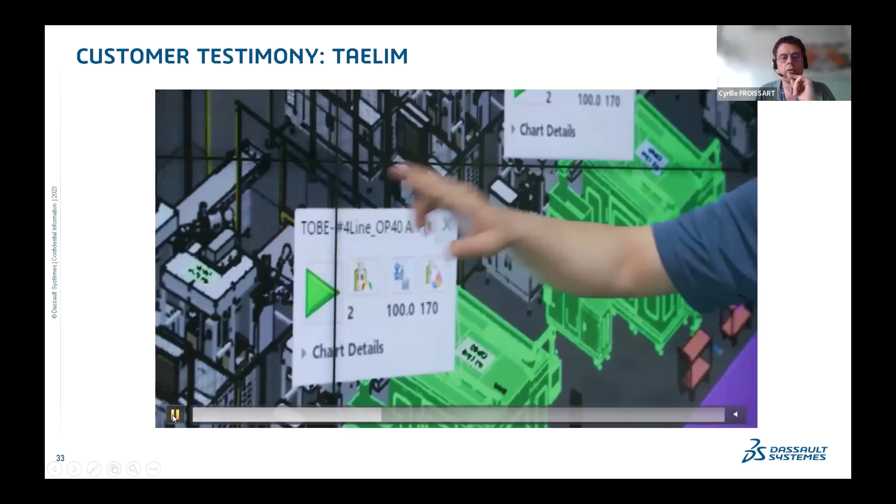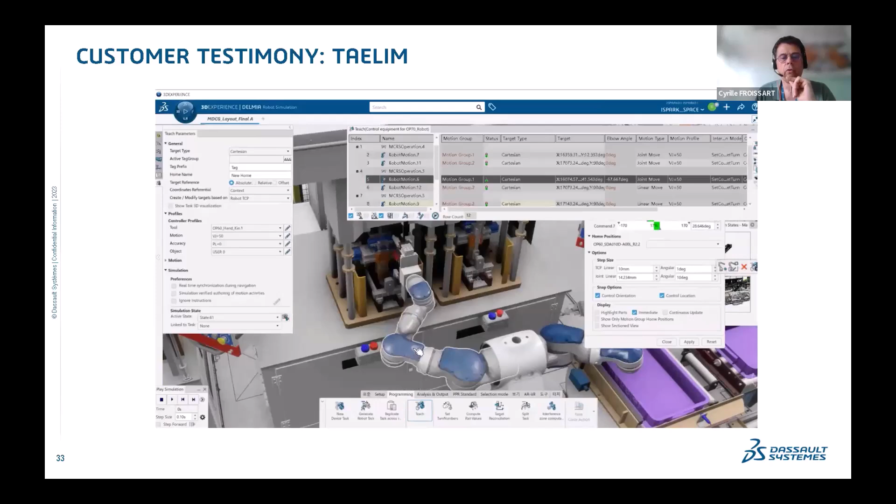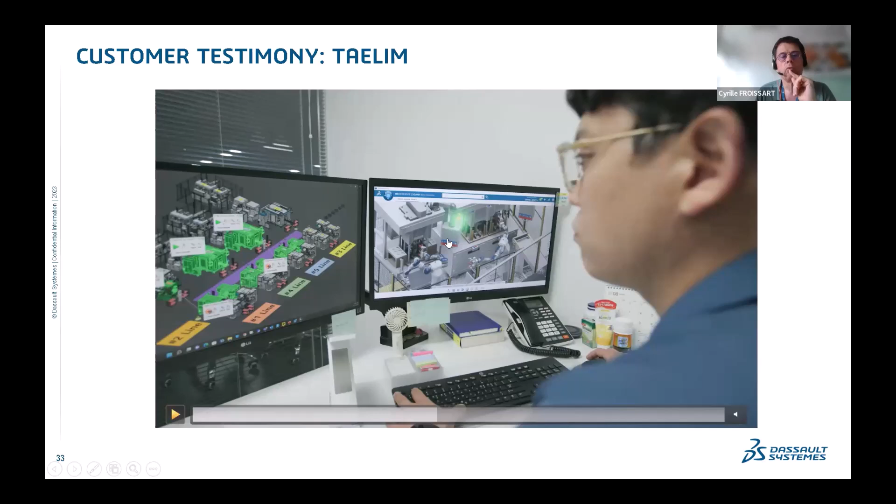Here we are now back in factory flow simulation. So let me skip this part. Of course, we can also use VR technology, and here we use factory flow simulation, the role that I have explained before, and just after we also use robotic simulation, and of course it can work in combination. Here on one screen we have the factory flow simulation, and on the other screen we have the robotic simulation to do a more detailed analysis on a specific station.

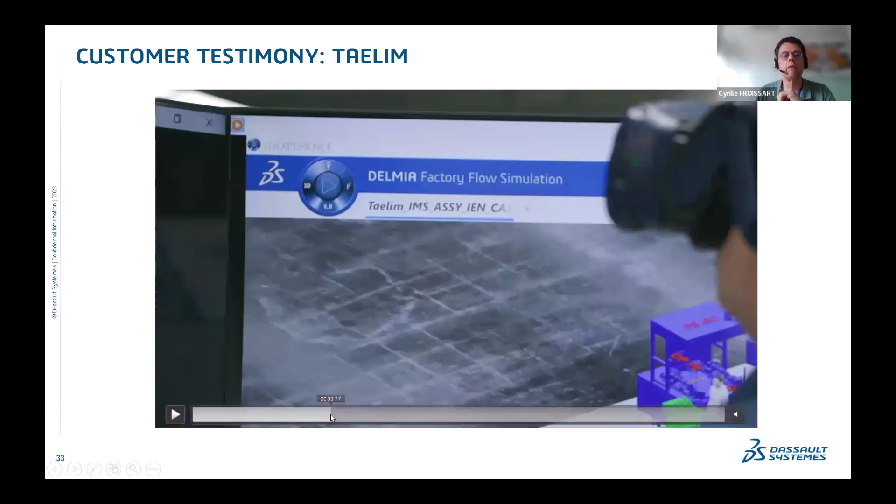Okay, so I think I have completed. We don't want to go through the whole video. It was just a quick overview.